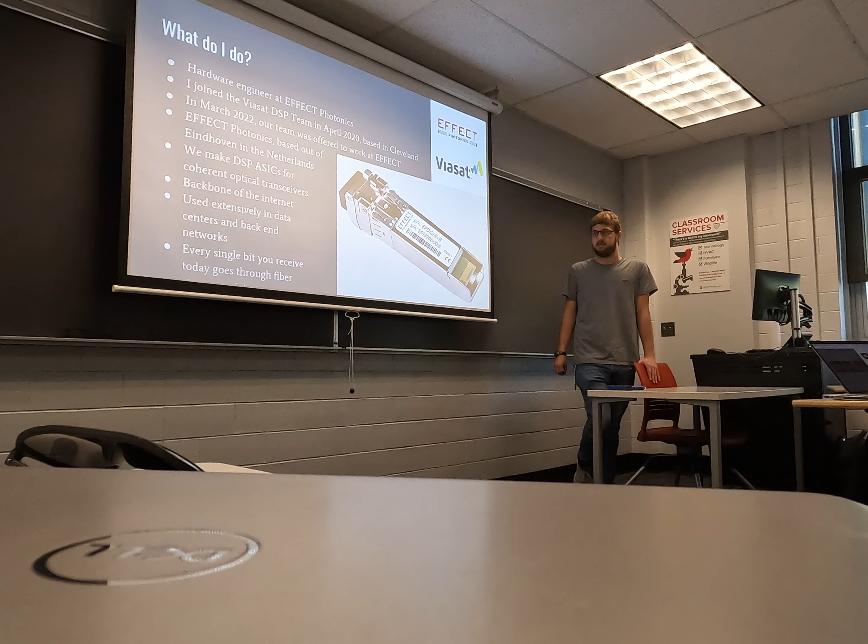And this is, in essence, the backbone of the internet. All the data centers and all the different gateways and things use fiber optic in order to communicate because it's by far the highest bandwidth way of doing digital communications. And every single bit you receive today goes through fiber, whether it's through your cell phone, cable internet, whatever.

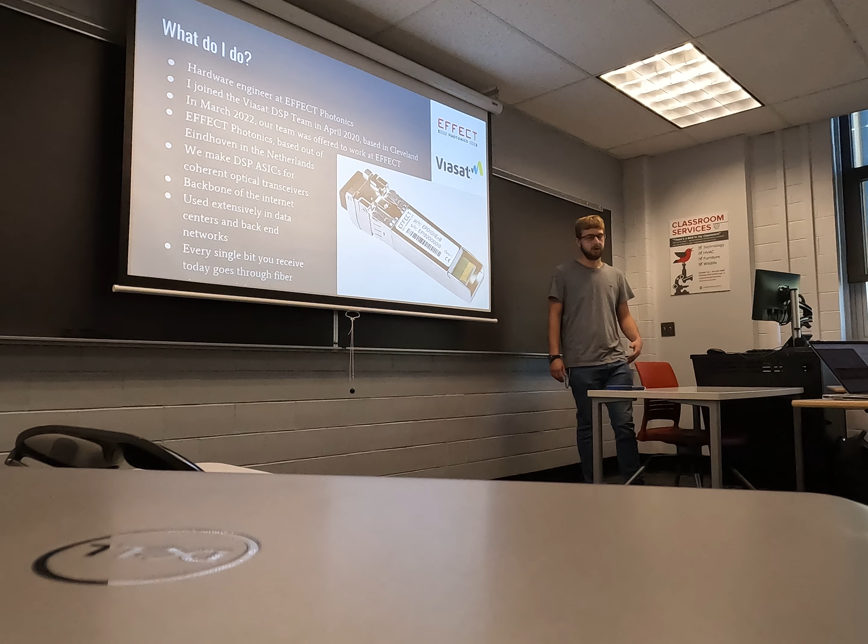So the most simple version of modulating and demodulating digital data through optical fiber is through what's called direct detection. This is kind of what you'd imagine if you were to take a laser pointer and just turn it on and off at a specific data rate. It's just capturing the amplitude of it. In the simplest form, it's just capturing whether it's basically low or high and doing some kind of simple thresholding. This actually works quite well up to certain bandwidths and distances because optical fiber, like laser light, just has a very high frequency, so it doesn't necessarily require more advanced modulation techniques that you might see in RF.

One issue with this is that the receiver isn't able to get the phase information from the signal, so it's only able to capture the power or amplitude of the signal. And this puts a limitation on the kind of post-processing that can be done on the received signal because it simply doesn't have all the information that was available in the channel itself.

The biggest thing is that there is a very important concept called chromatic dispersion, and this is the reason that rainbows exist and all kinds of stuff like that. Basically, different frequencies of light travel at different speeds through a medium, and that over the distances that we talk about in optical fibers causes pretty significant distortion of the received signal.

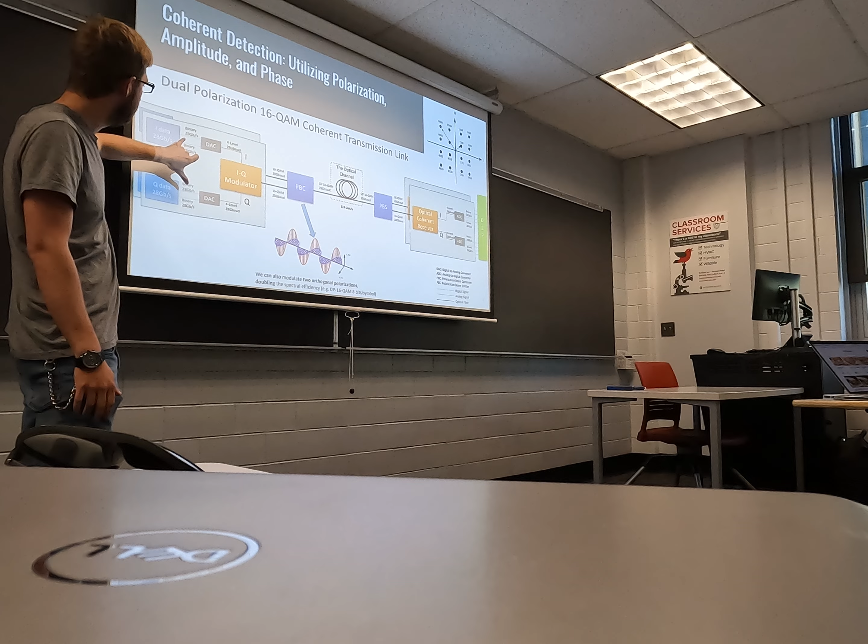And this diagram here shows that in a little bit more complexity, where you can see 2 separate modules that are taking I data and Q data, converting it from digital to analog, modulating it with a sine and cosine tunable laser in this case.

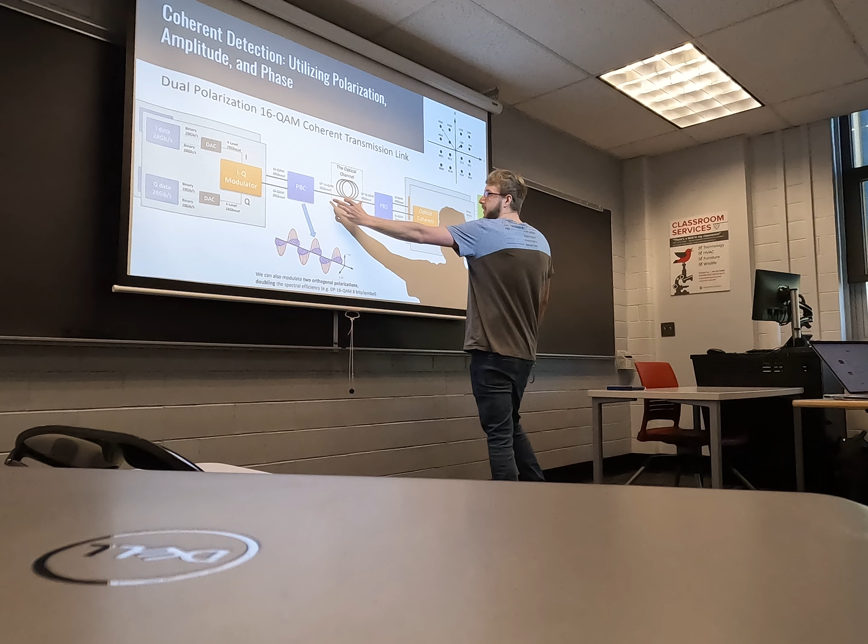These tunable lasers are horizontally and vertically polarized, so they are combined together in this polarization beam combiner. It runs through the optical fiber, which is where all the impairments happen, or most of them really. Then they're split at the receiving end, and then they are demodulated using, again, tunable lasers, or a single tunable laser with a 90-degree phase shift, and then they are digitized, and then it reaches the DSP, and this is actually where I do my work.

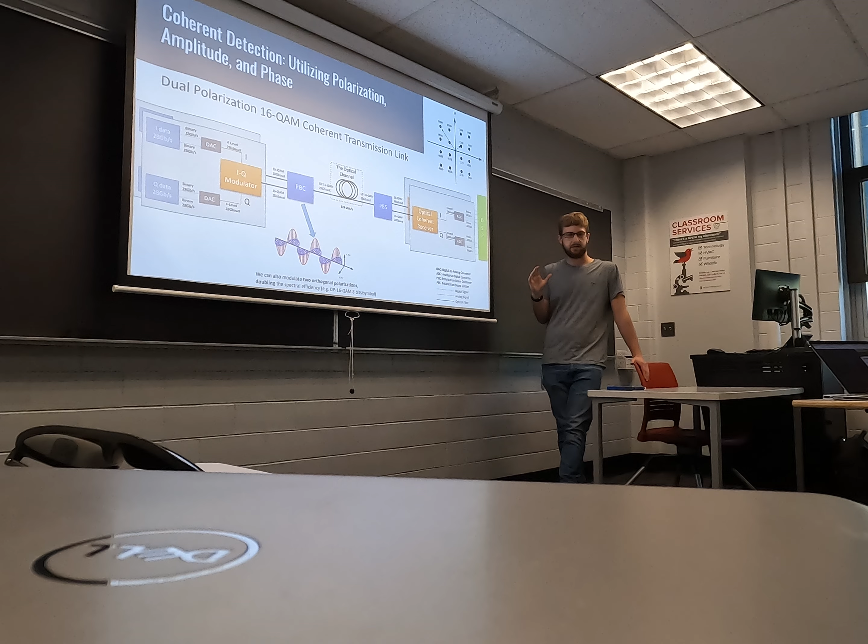So the received signal in the DSP is, you could think of it as every sample you have 4 numbers, and those numbers are quantized. They might be like 8 bits, 6 bits, depends on the use case. So not only are they not floating points, they don't have infinite precision, they have a very finite precision. So there is a very real concern of quantization noise, and that can definitely cause effects downstream.

Some important metrics that are very important, of course, for machine learning, because you need some kind of metric, some kind of cost function to guide the process, are twofold. There's OSNR, optical signal to noise ratio. This is more or less what you learned in some of your other undergrad classes, that you have a signal and a noise, and you can compute the power of both of those and divide them, and you can do the log as well. One thing that's kind of important is that you don't necessarily have the noise power on hand. You have to estimate it, normally by comparing the transmitted and received symbols, and from that you can get the MSE and compare that to the signal power.

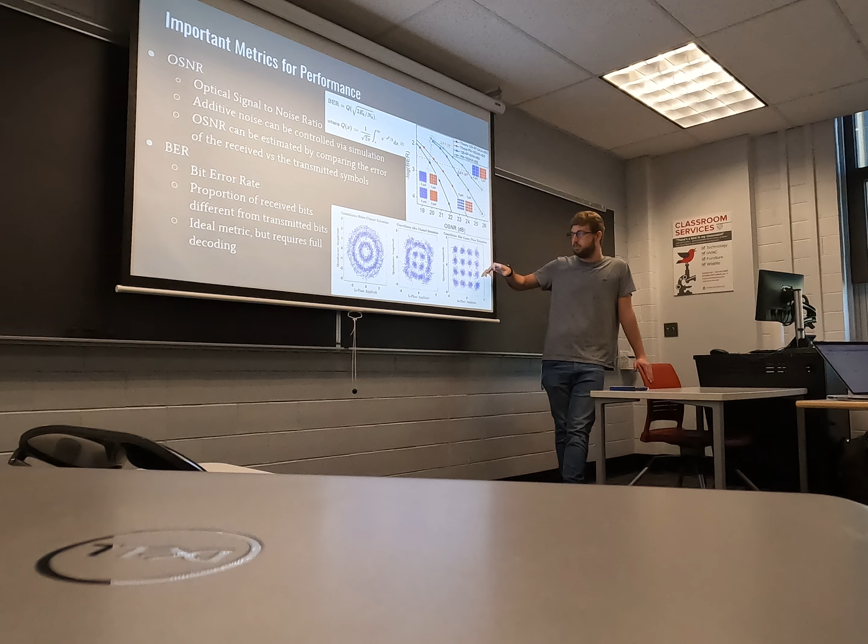This one is a little bit more difficult, because even if you have this constellation right here, you don't necessarily get the bit error rate, because you need to decode the data further, the most simple case being drawing a grid like this and doing a simple detection. It's basically a 16 hypothesis testing. And you also have to know where the bits should be. So you have to know whether it should be here or here or wherever. So you do, again, need the transmitted data, and you need to correctly do everything through the process in order to get to this point.

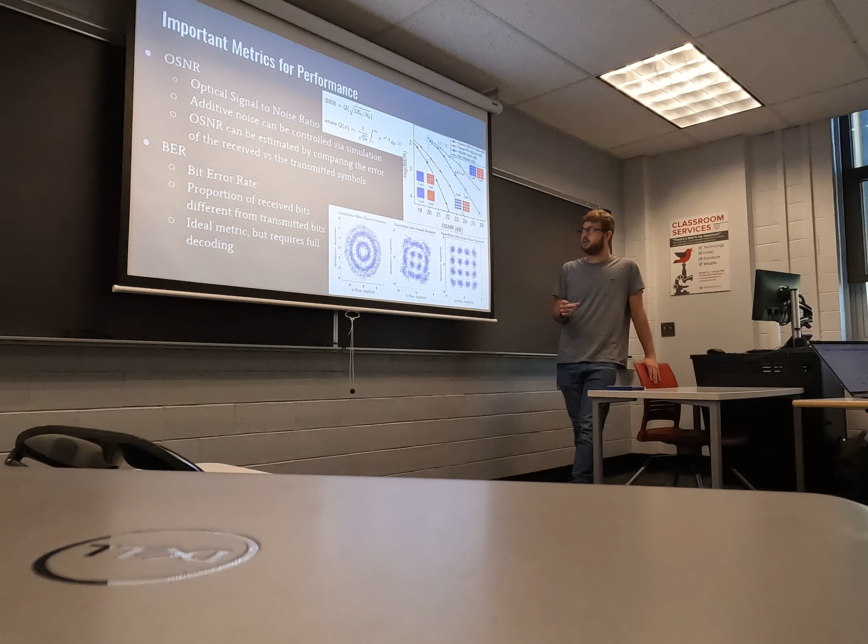And one more thing is that the OSNR and BER are related pretty intimately. If you at least assume Gaussian noise, which isn't an unreasonable assumption, you can calculate what the theoretical BER could be given some signal to noise ratio. In that formula, it shows Eb/N0, which is the bit energy to noise ratio. They're very simple computations. It's just proportional to the number of bits per symbol.

Another thing is adaptive equalization. This is the closest thing to machine learning that I see in my day-to-day job. It's basically having a series of filters that are simply iteratively computing the residual impairments and correcting for those. And that's more or less the last step before you actually decode.

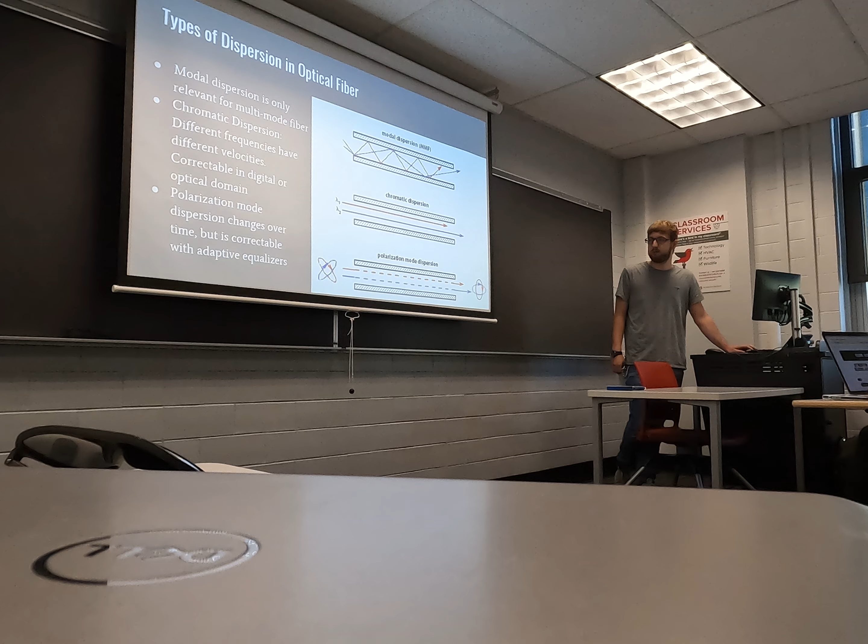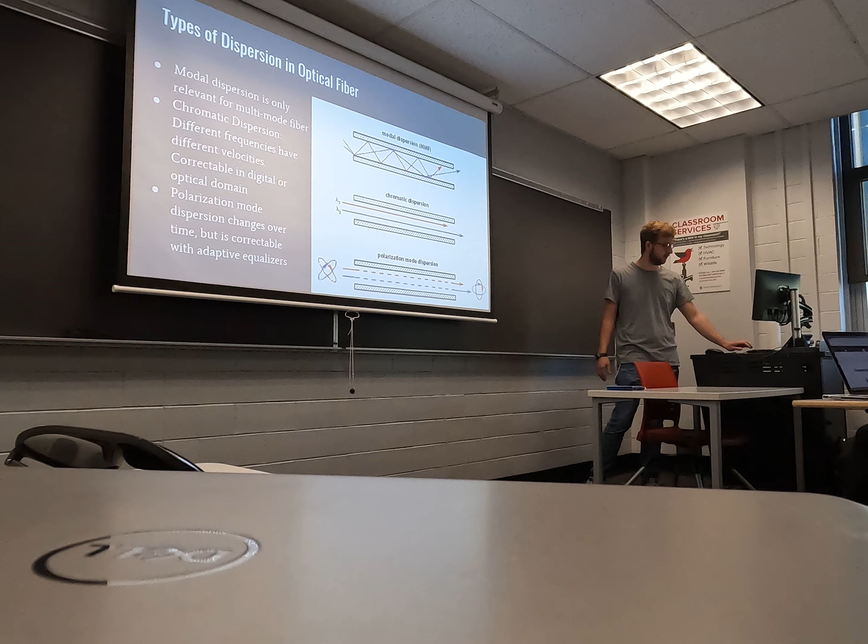And polarization mode dispersion is an interesting one: basically the horizontal and vertical components can have different speeds because of imperfections in the fiber as it propagates. And that also can be corrected linearly in the adaptive filter.

A few more impairments that are worth mentioning. Some of the linear ones are actually created not in the channel, but in the electrical domain itself. So as it gets turned from an optical signal to an electrical one, there are a few different places that you can get these impairments. They are typically corrected first thing once it's received, because you need to do that before you do any frequency offset, because it needs to be in the same frequency as the others.

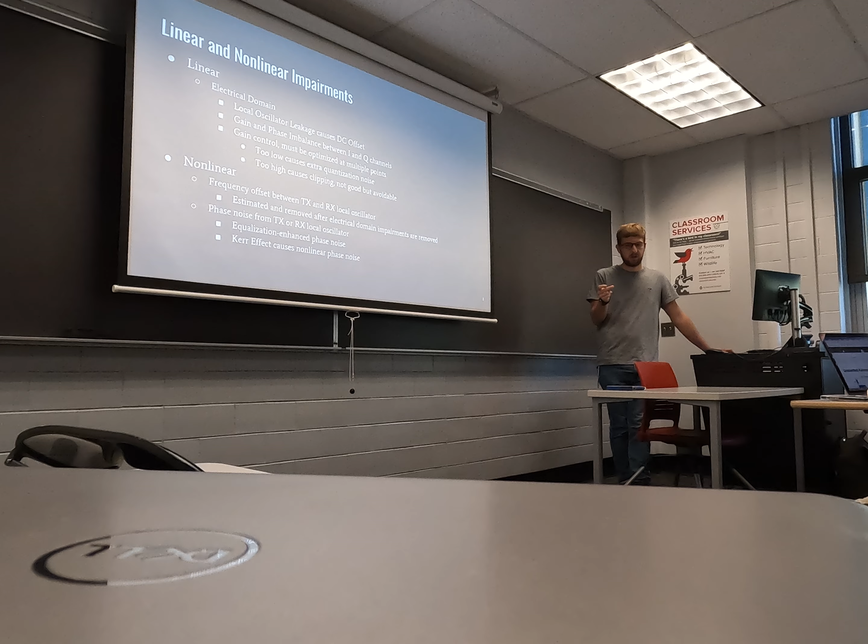Nonlinear: the frequency offset which I described is pretty straightforward to be estimated or removed. And the phase noise from the RX or TX local oscillator: we assume that things are additive white Gaussian noise, but a laser isn't a perfect sine wave. It has what's called linewidth or phase noise that is mixed in with the received signal.

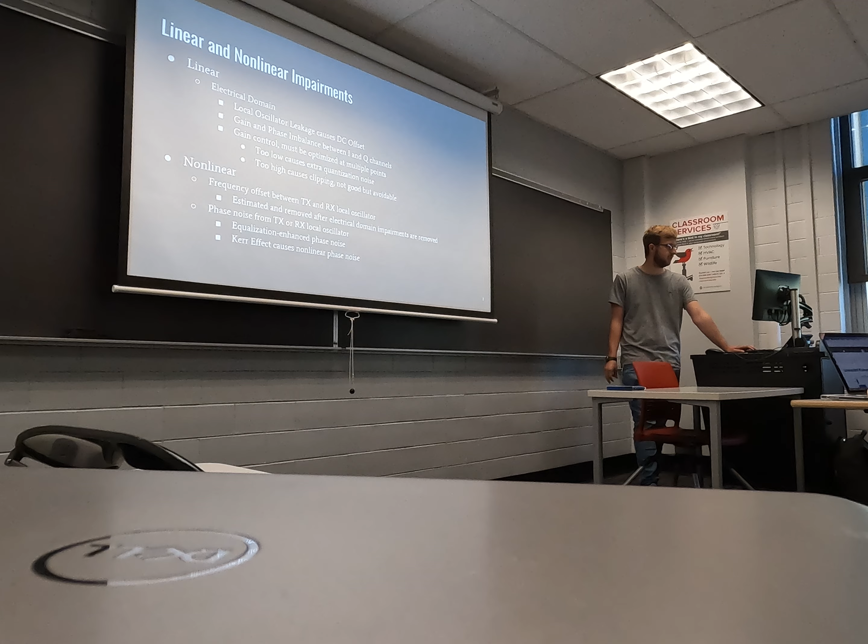On its own, that's not too bad, but it can become worse and become nonlinear when that signal is equalized, or in the actual channel itself there's something called the Kerr effect, which can cause this phase noise to become nonlinear, and that will be described later.

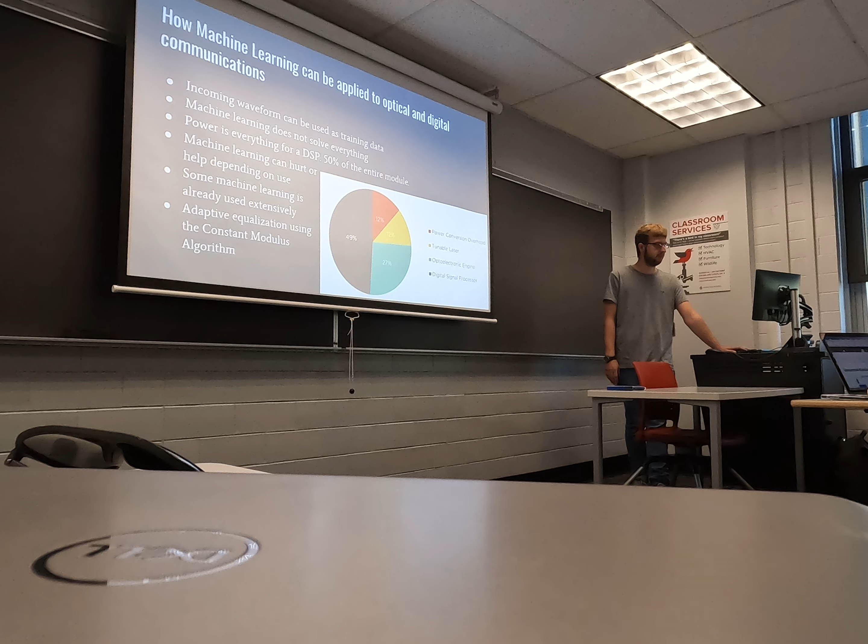As I mentioned, the signal processing that we do is not very machine learning based, at least in my day-to-day job, but there are definitely a lot of applications. Machine learning has a lot of applications for this because you can get the training data just by turning on the receiver. A lot of the power consumption of one of these modules comes from the DSP itself, so if you can utilize machine learning to reduce the power consumption, that would be very, very helpful, because power is everything in this.

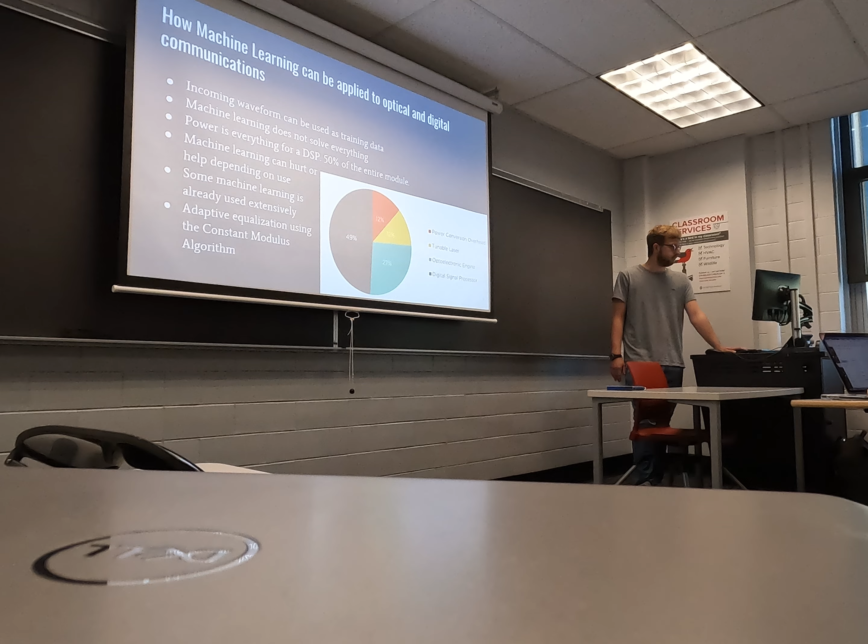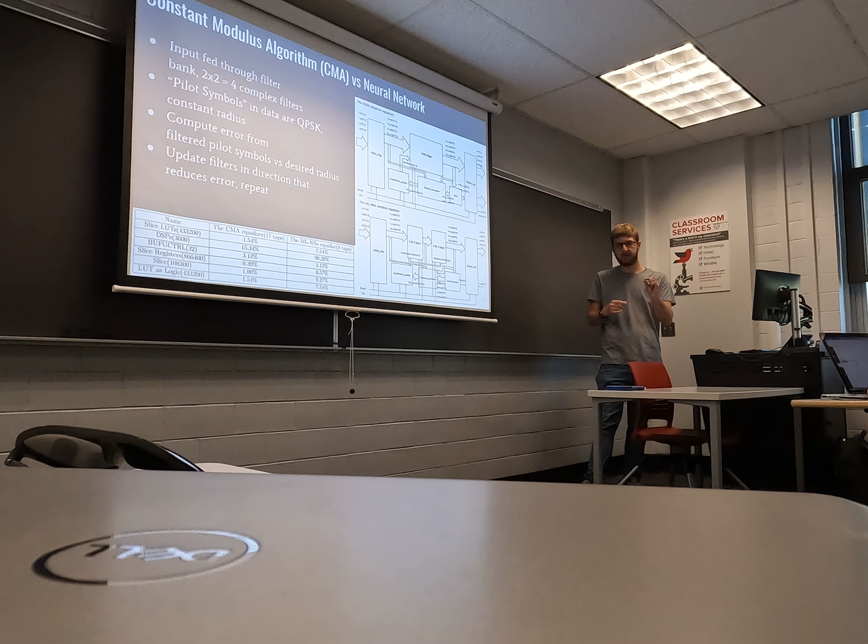And as I mentioned, adaptive equalization is something that we use in our day-to-day job. This is a more detailed breakdown that I found in the paper. Basically, the top diagram is showing a simple FIR filter. You could think of it as a single-layer deep neural network that is simply computing what is called the constant modulus. So you can assume that at least some of the symbols are going to be at a specific distance from the origin, and have a filter that is optimized by minimizing the average error of those symbols from the target radius.

What that does is allow you to do adaptive equalization and control the output power, because you can control that radius. And in the bottom one, this thesis created a simple neural network that uses, instead of a single FIR filter, two FIR filters. And the funny thing is that in the end they were shown to have more or less identical performance, but the neural network design had a lot more resource usage, especially of the DSP blocks in the FPGA.

So it shows that machine learning isn't just some hammer that you can hit on anything. It really does require a lot of thought, and it can't just be used to solve every problem out there.

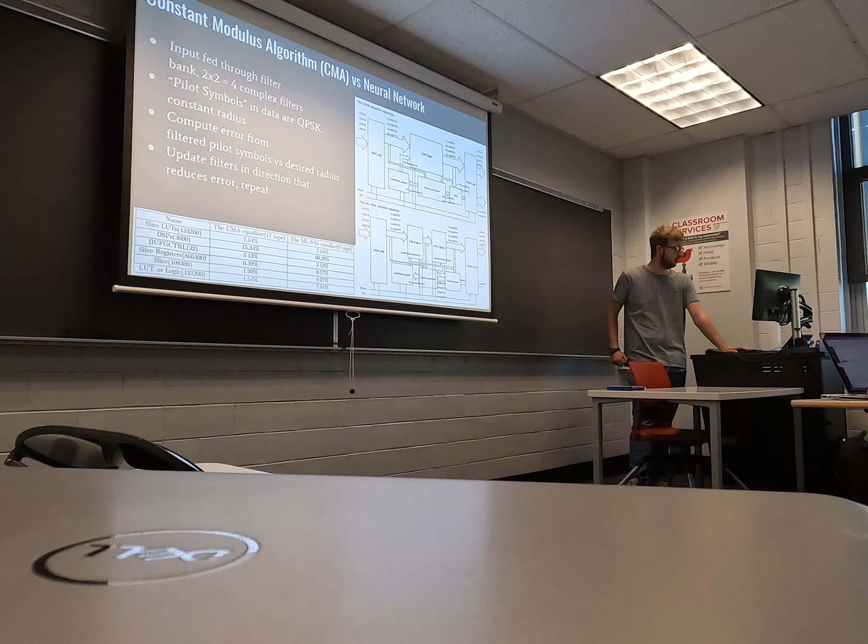What you do is you take the data, find a subset of it, say 512 samples, perform an FFT of that, and multiply by this computed reverse channel function, which is parameterized by the length of the line, which you can either just know, estimate, or just guess and check, trying different values until you get the right one. And that doesn't change, so it's okay to do that.

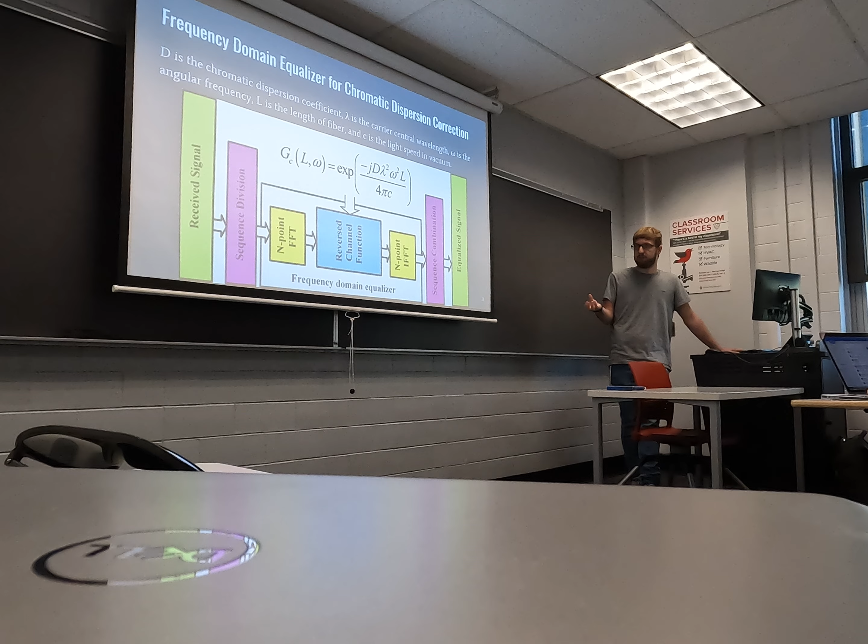And then there's the frequency of the tunable laser, which is also known, and a bunch of other constants that are thrown in. So you multiply that by each of the 512 points, do an IFFT, and now you have a signal that is basically completely corrected for the chromatic dispersion.

One issue with this is that the chromatic dispersion and phase noise don't play nicely with each other. Basically, the correction of chromatic dispersion actually exacerbates the phase noise and causes what was sort of a noise along the radius to turn into a sort of noise that's more like additive white Gaussian noise. And that causes pretty serious issues for higher line widths or higher chromatic dispersion. What this article goes into is quantifying that.

It's not actually using any machine learning, but it has this very handy graph. I'll quickly go over this. The OSNR is the signal to noise ratio. In a lab setting, it can be controlled, and it's very useful because you can compare to the theoretical bounds or compare different operating conditions. And then of course the bit error rate is on the vertical axis.

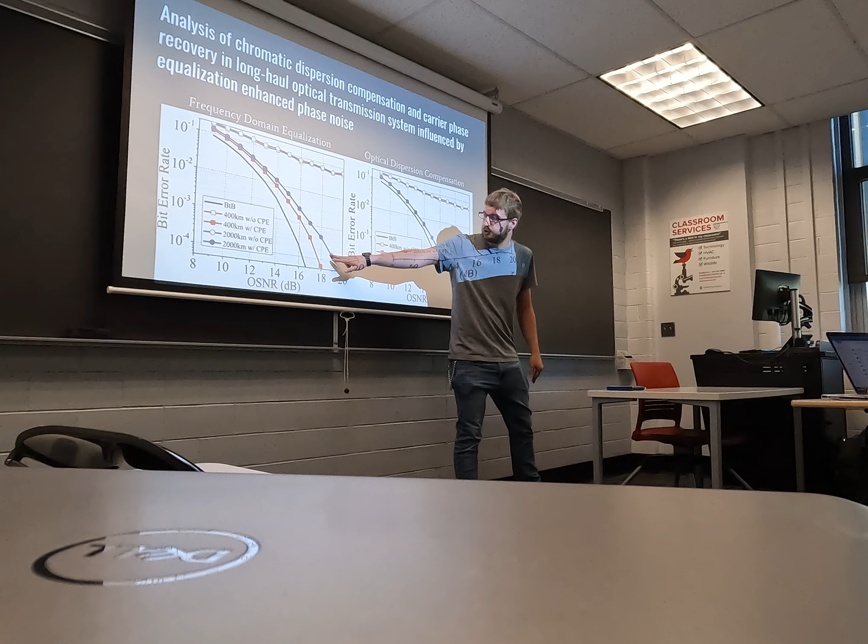So what you see here is that on the left you have the frequency domain equalization, which is here. And you can see a pretty steep drop off, especially for the 2000 kilometer case versus the 400 kilometer case. So as the CD increases, it has worse performance.

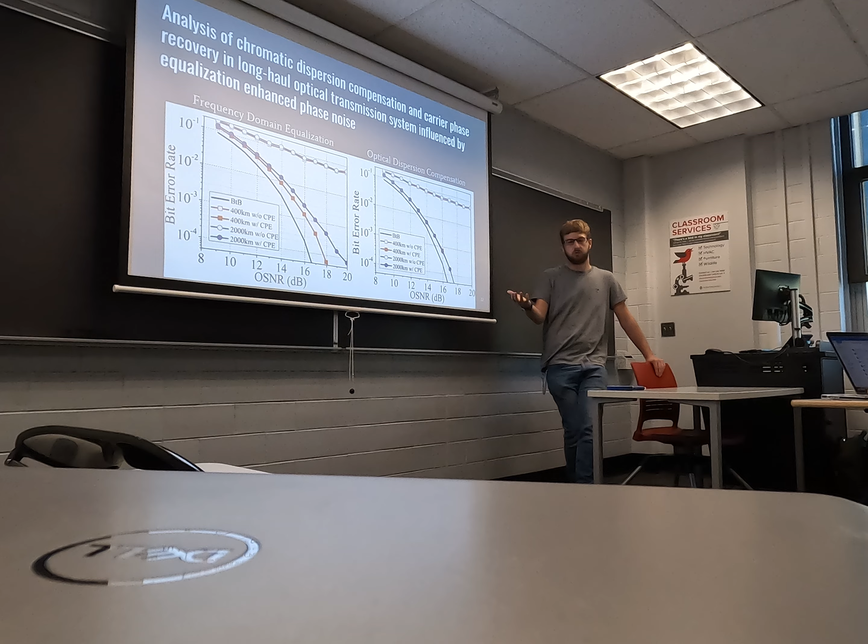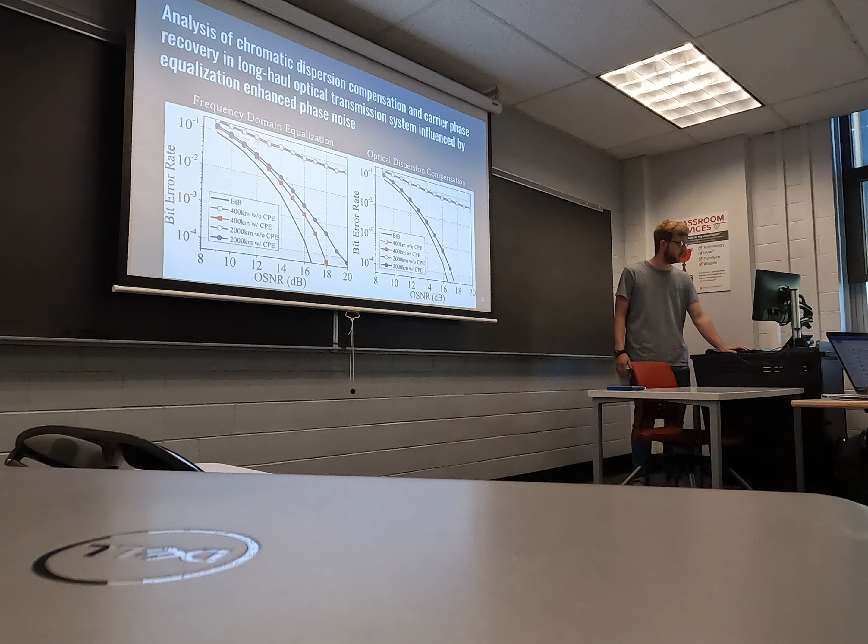And then on the right, you can see they're kind of on top of each other because this is done using optical dispersion compensation, so you can actually have hardware outside of the DSP that is performing that inverse chromatic dispersion effect instead of doing it inside of the signal processor. And that avoids this issue where the digital compensation of CD interacts with phase noise, because it's done before the laser modulates it.

This shows a more advanced machine learning technique called kernel least mean squares. It is a least mean squares algorithm, which is a type of iterative machine learning algorithm, but it first transforms the input data, meaning the received symbols, into a higher dimensional feature space. In this example, it uses the Gaussian kernel, which, as far as I'm aware, is actually an infinite dimensional space, but it finds a subset of that space and uses that to create a CD compensation filter that is also able to correct for the nonlinear phase noise I described earlier.

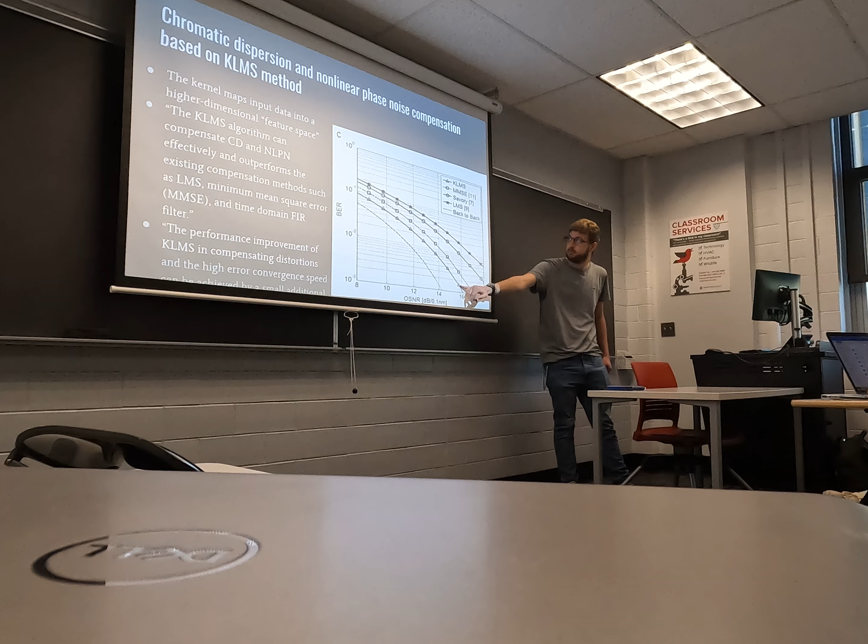And you can compare it to this one, which is more or less similar to the frequency domain one I described. So it has a higher bit error rate, and then the KLMS is much farther down here. This back-to-back is basically what would happen if there's no CD at all.

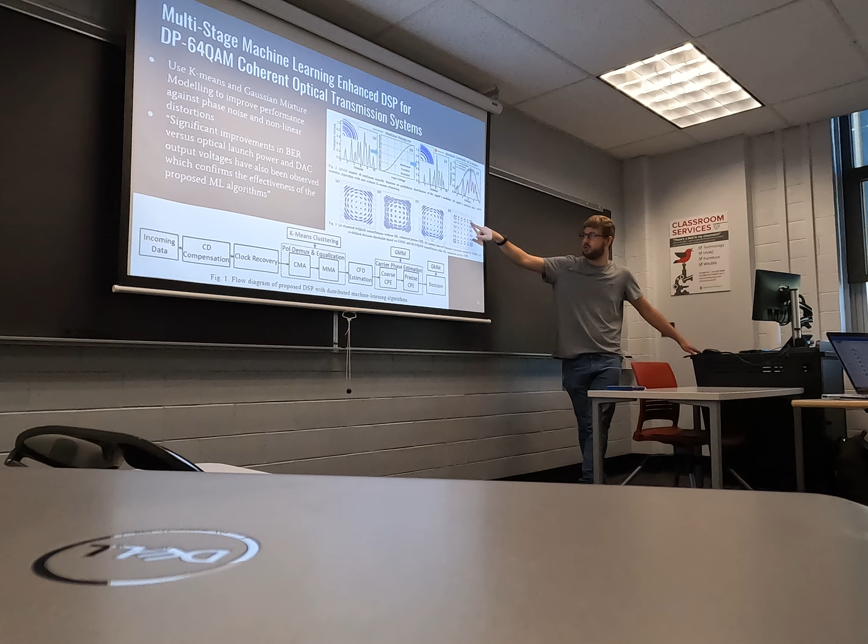All right. This is a really interesting example of more directly applying machine learning principles to coherent modulation. In this case, you have a 64 QAM signal, so it has 64 points. The more symbols you add, the more you have to concern yourself with noise and other impairments, because if you only had 4 symbols, you have a lot of room for error. But here, especially towards the outer edges, you have a serious likelihood of getting a bit error. And it's non-uniform; in the middle, it's much easier. This comes from the nonlinear phase noise that is more or less unavoidable.

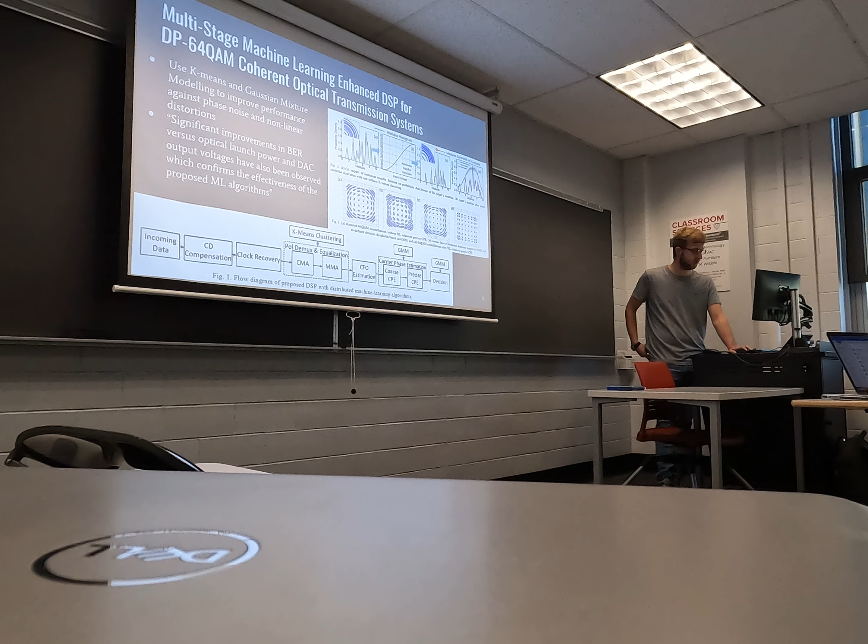What this article does is apply k-means clustering and Gaussian mixture modeling to a pretty typical coherent design in order to create decision boundaries that are definitely optimized, but definitely nonlinear. So it uses machine learning to create this boundary set, and it improves performance pretty significantly by doing that.

Okay, so now we're going back to direct detection. What I mentioned earlier about direct detection having limitations in how it can resolve CD, that's not strictly true when you're able to utilize machine learning. Direct detection takes the signal and only captures the power, so it's a nonlinear transformation because it's basically squaring the data, or multiplying by the complex conjugate. And you still have the amplitude and can make estimations with that.

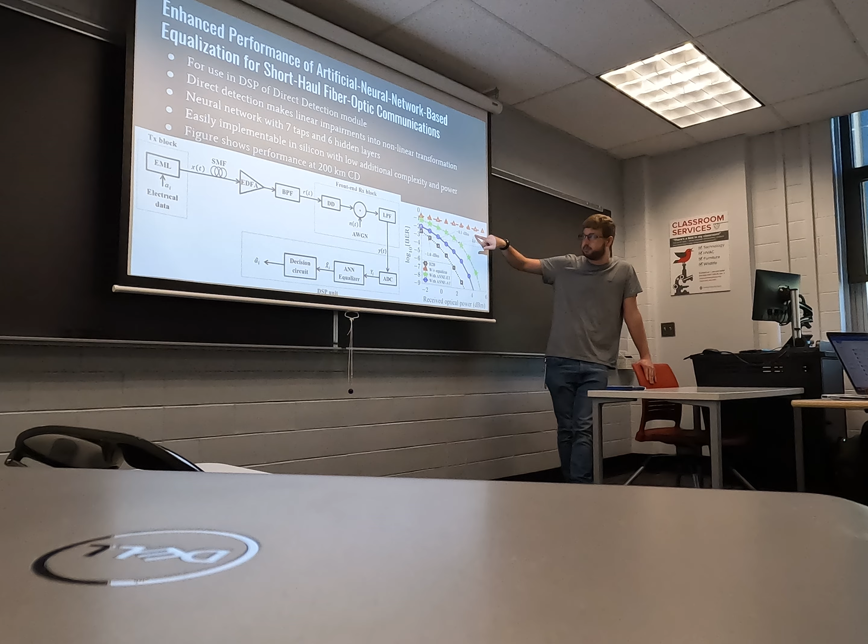It's able to show that without an equalizer, which is typically what you would see, you have basically terrible performance in the CD range that it's showing here, which I think is 200 kilometers. You have 200 kilometers, and then with this, it is much closer to the actual back-to-back. So it's much closer to if it had no CD at all. So this allows you to have direct detection at a much larger distance than what was previously possible.

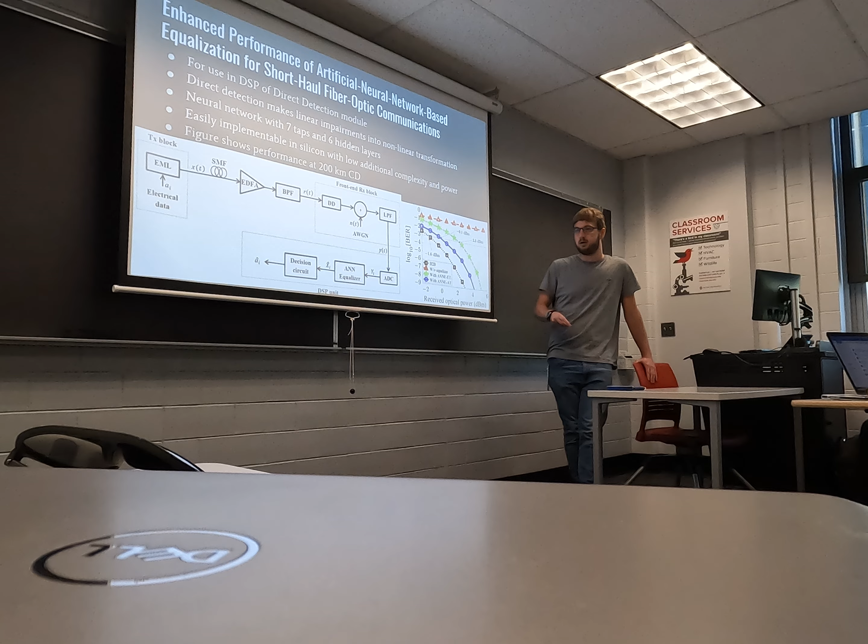This is only able to be done using machine learning because this is a nonlinear function that it has to be estimating and inverting. And that just simply can't be done using linear means, and it really can't be done with more simple estimation.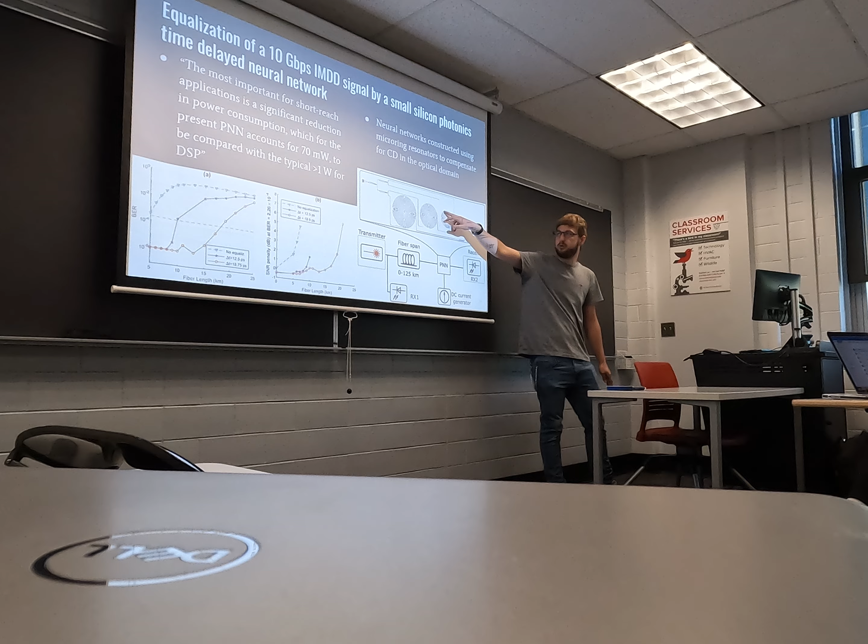And these micro-ring resonators are used as photonic, what are they called? Photonic neural networks. So each of these kind of represents a neuron, a feed-forward neuron, and it's able to be trained and have some of its parameters controlled, related to its coupling and other things. It's a nonlinear system, so it can do really interesting things with that.

And what this does is once it is trained, it is able to, in essence, do this, but in photonic neural networks, at much, much lower power, and could be its own discrete device that is able to compensate for CD before it even reaches the receiver, and at a very low power. So this is a very interesting development.

Like I said, there was a subsequent article that went to 8 of these microring resonators, and the performance was even better, and it was still a fraction of the power. So this is something that really may make direct detection more of a viable option, because it previously had been limited in data and range because of those limitations I mentioned earlier. And aside from that, these are just all the references that I had in the slides, and that is all.

Very interesting. So the last reference, the one you just mentioned, or the second? Second to last. Okay. And I'd be happy if you could find a way to access this article, but it was by the same authors. I could even send you the link to it, but it was from SPIE, and it was only posted like 2 weeks ago, and it seemed really interesting. I read the abstract.

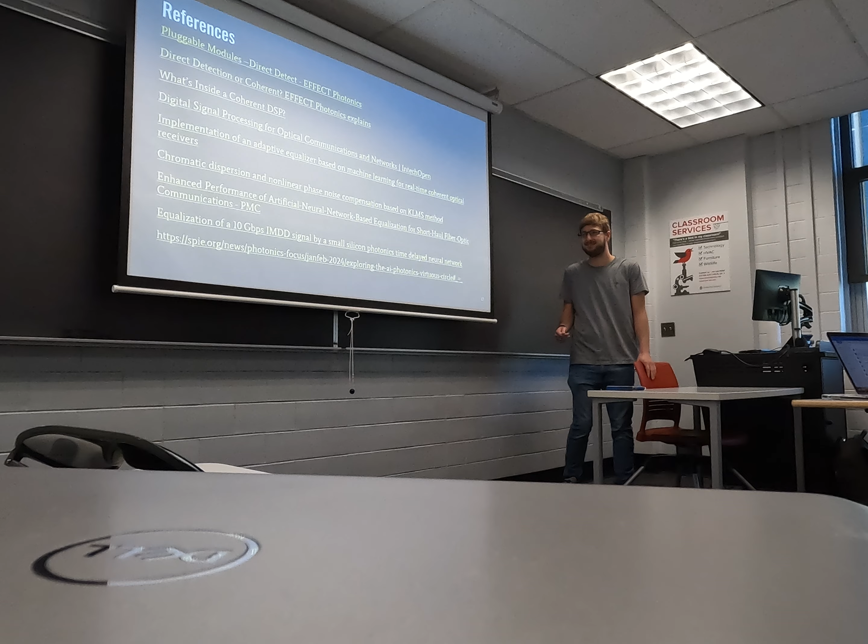Was it not accessible by the libraries? I tried to log in using the institution, and it kind of kicked me out. I can't really describe it. It didn't let me log in. Well, if you contact the library, you should either have direct access, or if you don't, they should be able to get it for you. That's true. I tried to look through the library catalog, but I think it's just because it's such a recent article. I was actually able to request it from the authors. It should be there. If Ohio State doesn't subscribe to that, then they should be able to get it to you. When you get it, send it to me. Yeah, I very much will.

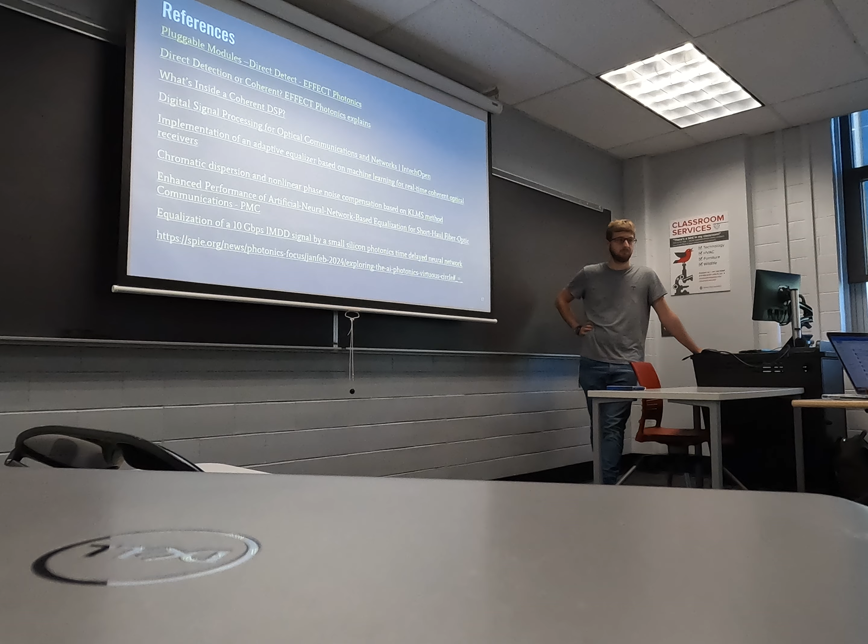I'll probably stop by the library after this, because it really is a great top off to this, because you're actually using photonics to create neural networks for photonic impairments. It's just very recursive. It's super interesting. So I'm really interested in the development of this. So this is kind of the next generation of things, right? Yeah. If you can create the learning elements in the same domain as what you fix, that automatically brings the efficiency. Absolutely.

So it's very interesting. I will mention the reason that the DSPs use so much power compared to the rest of the chip is just a natural consequence of how transistors function. Every single time they switch, they use some amount of power, and when you have billions of those things operating at basically full capacity the entire time, it just naturally uses a lot of power. And something that uses 3 or 5 watts doesn't sound like much, but then you have entire data centers using that, and it very quickly adds up.